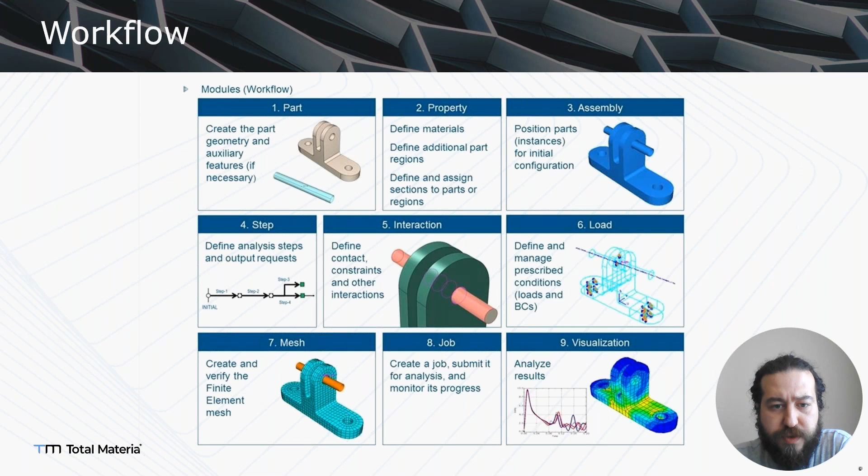So, the workflow we are looking at: the parts, the property, and assembly. Today we will talk a little bit about the parts section and a little bit about the interaction section, I mean the contact area especially.

So what are parts? We are talking about the formed ones, but we also need to consider the rigid parts, which can be included in a forming simulation. For example, a die. We can model it as a discrete part which has a surface mesh, or we can continue with analytic rigid parts, which you can see here.

So if you want a more precise solution, you can go with the analytical rigids. Also, if you have really big strains and really big deformation in your model, you can choose the Eulerian solution, which can be modeled with the coupled Eulerian-Lagrangian method.

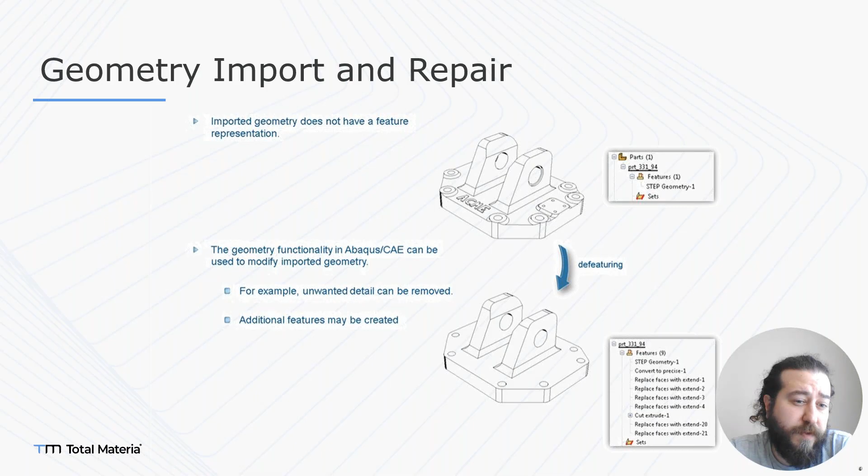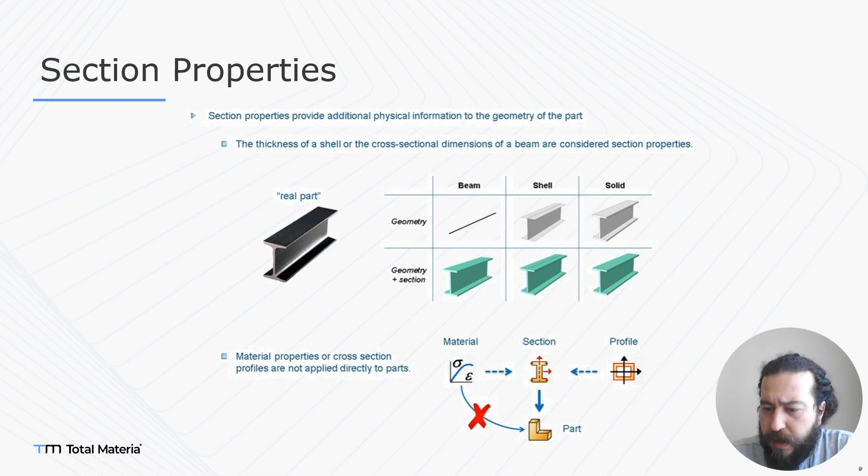But also geometry import and repair needs more attention, because you don't want all the details in your finite element model. So you need to simplify some of the regions. And you also need to choose which properties to apply. You have a real part like the one on the left side, and you can choose which one fits your solution.

If you look at the contact behavior, it is a very nonlinear, challenging effect. In the previous webinar, we talked about geometric nonlinearity, a little bit of contact, boundary nonlinearity, and a little bit of material nonlinearity. But this webinar will be a deep dive on these nonlinear effects. So basically, we have three regions to focus on: the properties, domain, formulation, and controls need to be taken into account.

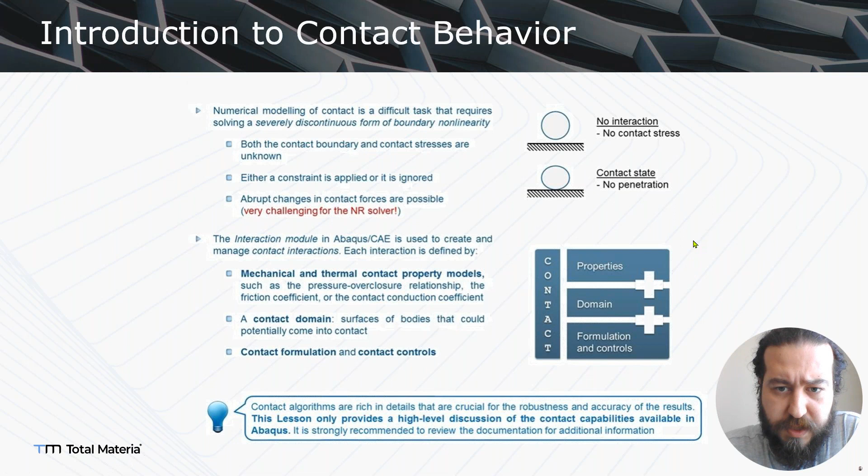This is the challenging part. As you can see, the contact properties have two kinds of behaviors that need to be considered. One is the normal behavior, which means approaching the contact and whether the contact solution is okay or not. The second one is the tangential behavior, which can be assumed as a slippery or sticky condition. Other things are the contact pairs, which contact surfaces can be made, and the roles. For example, master and slave surfaces need to be chosen, and the discretization method, like node to surface, and the tracking approach, finite sliding, small sliding.

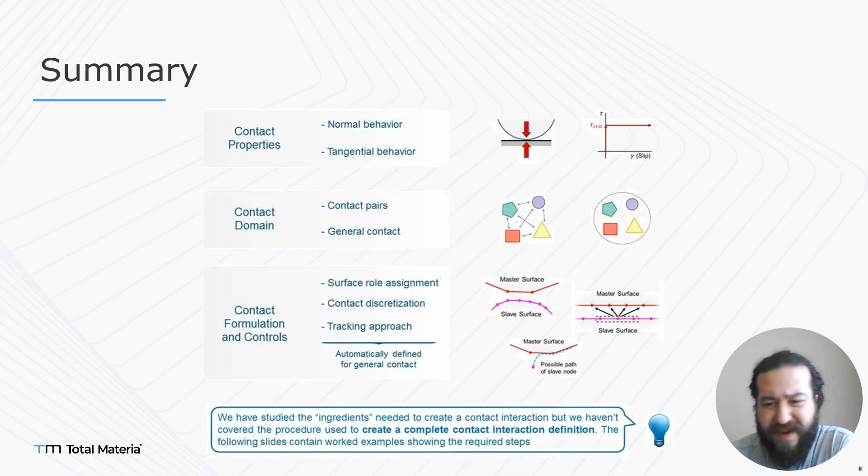But in this webinar, I need to focus on the contact enforcement methods, which are really hard to solve. Before the contact, you can see that there is no penetration and there is distance between the part and the wall. And at that point, in a very small timing area, your stiffness can be really high, which cannot converge with the Newton-Raphson method. So in this case, some enforcement methods come up.

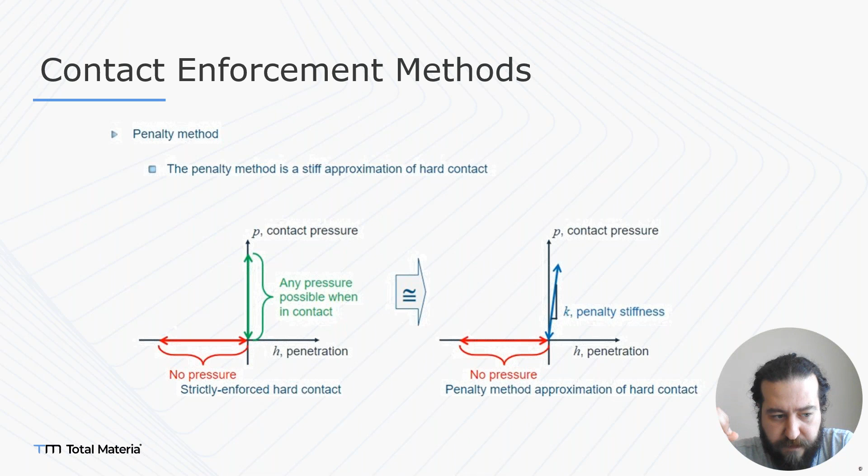One is the penalty stiffness. Of course, there is an error indicator in this contact pressure. We already know about it. If we implement a stiffness at the beginning of the contact and the penetration, we can solve it easily, but we need to check whether it really behaves normally or abnormally.

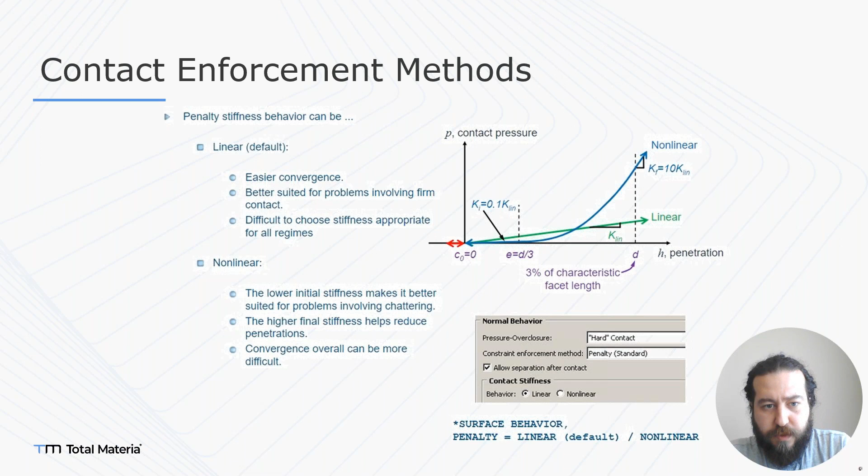So there is another method that can fit both the linear and the nonlinear approach: the augmented Lagrange solution. It can fit a nonlinear problem like this one. Both methods are applicable if you are doing well. If you know what you are doing with finite element methods, you can easily implement it.

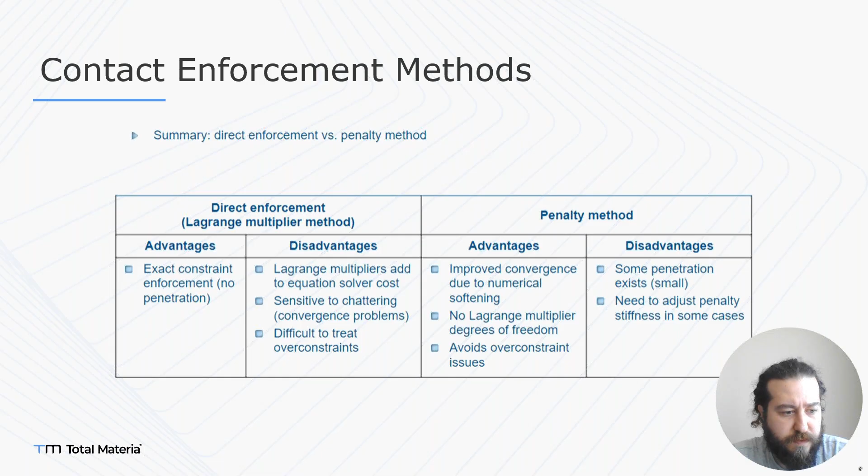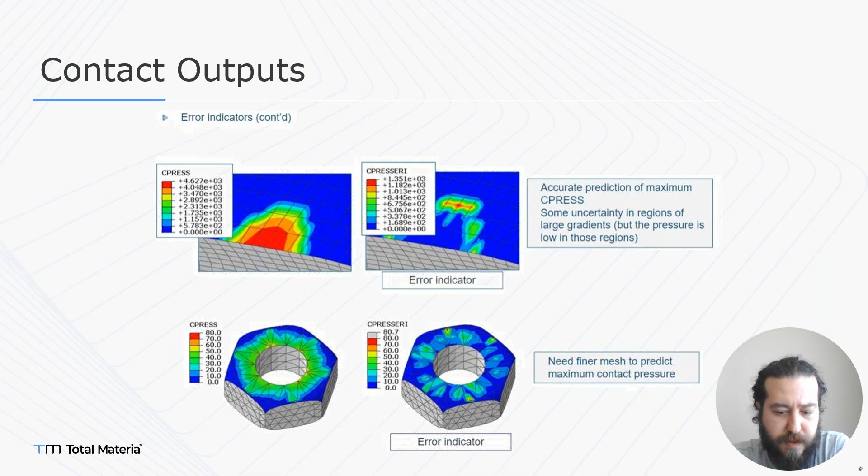And the contact outputs, which is the last thing I would like to say about contacts. For example, if you have a contact and you see the contact pressure like this, you must check the contact error indicator in Abaqus to know if it is okay or not, I mean the meshing criteria. If you are looking for the maximum contact pressure area but you cannot find it, when you check the contact pressure error indicator, it means you need a finer mesh to predict the maximum contact pressure. That's why you need to check your contact pressure and error indicator at the end of your solution.

If we go to material characterization for forming, we will speak about engineering versus true stresses and material test data handling. We have a bunch of Excel files and Python scripts about it. Also elasticity and yield point investigation and its importance we will discuss. And also the hardening curves, Ludwik-Hollomon, and I also put the Johnson-Cook material plasticity model. We can also speak about Swift, Hockett-Sherby, or Voce, whatever you want.

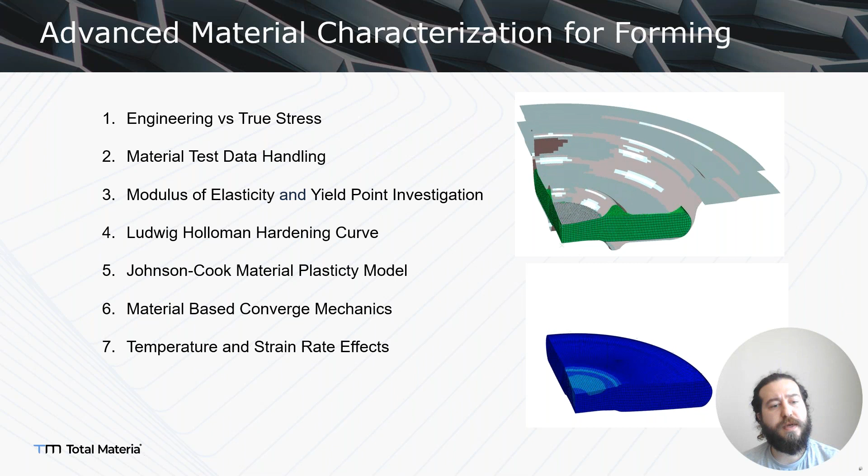And the material-based convergence mechanics we will talk about, and the temperature and strain rate effects. So engineering versus true stress is an interesting phenomenon that I just want to say one word about.

If you are doing a finite element analysis, you need to consider all your test data; all your material data should be true stress and logarithmic strain, I mean true stress-strain. So if you have an input, you need the true stress-strain. If you have an output, you will read the true stress-strain.

Unless you have a hyperelastic material, or really big strains that can be softening, not hardening, like titanium at 800 degrees or something like that, or changing the crystallization area, this one cannot go with the true stress. You need to go for the engineering stress, actually. So this is the key point of which one should be selected.

If you have a low strain like metals, steels, or aluminum, you can easily go for true stress. So if you have test data, you need to consider the conversion from the engineering stress to the true stress. There are also some Excel sheets for it, and you can try to check it.

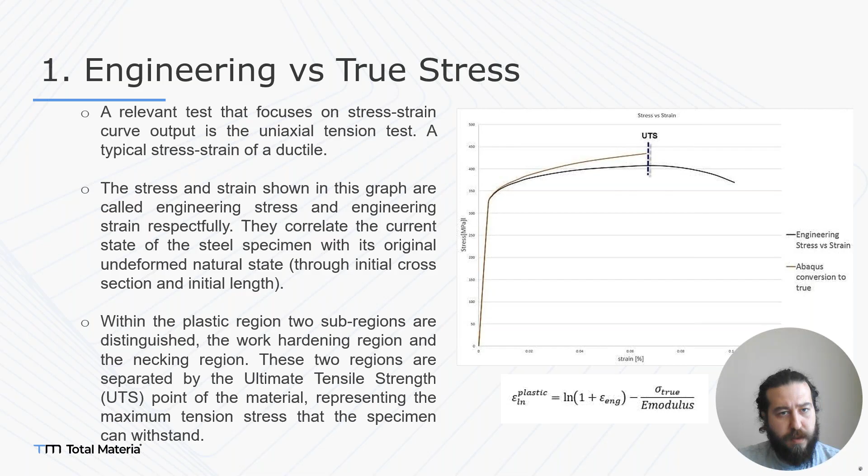You will see the Excel files, I will also share them with Zaim, and you can get them from Zaim, that have nominal stress, nominal strain, engineering stress, logarithmic strain, true stress, and some Young's modulus has been calculated in here. You can directly calculate your modulus of elasticity via nominal strain, I mean the test stress data, directly, because in lots of metals, converting from engineering to true stress is a very low change. So it doesn't change the calculated modulus of elasticity at the end. It could be both true. You have an assumption, actually.

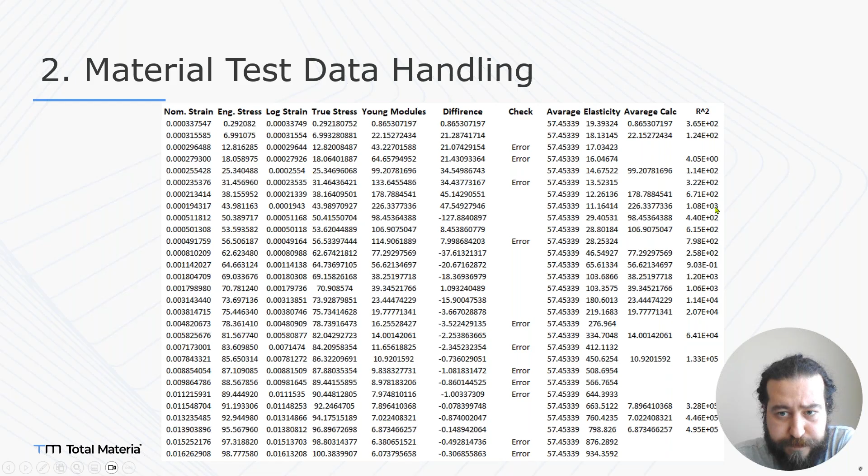But before you go there, you need to check your data, the differences, I mean whether the stress level is increasing or lowering. You need to check it before you calculate your average modulus of elasticity, and you need to check your R-squared value according to the average calculation.

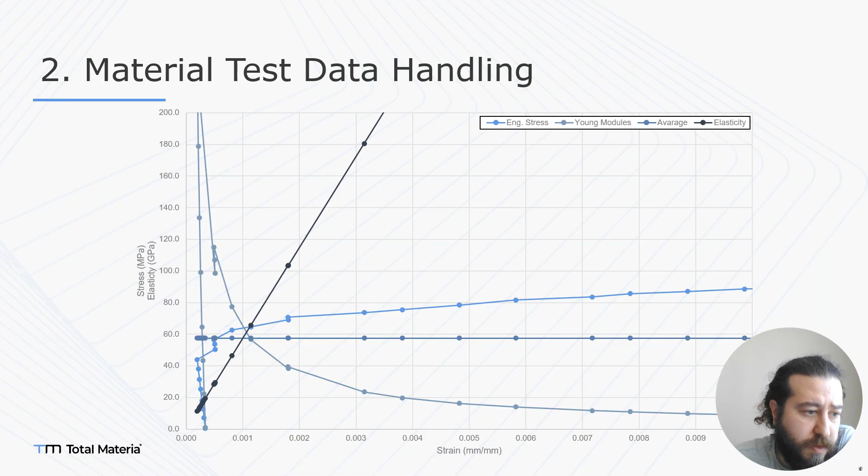For example, some data is really bad; as you can see, you have an engineering stress in here, the light blue curve. So basically, you are investigating your modulus of elasticity, but you see that there is an error in here. It's going to negative strain. So you need to check your data. Maybe you can shift it, or you can just manipulate it. So you need to grab the elasticity in here and the average values in here to check which modulus of elasticity needs to be taken into account.

So basically, if you have a material like this one, you can see that there is no specific yield area. This is not the yield, by the way, because this curve is not linear. So if you have a material but you cannot find the yield point, you need to assume it. If you have hot forming, at higher temperatures, you can basically go for the Hollomon model, which means directly the plastic area.

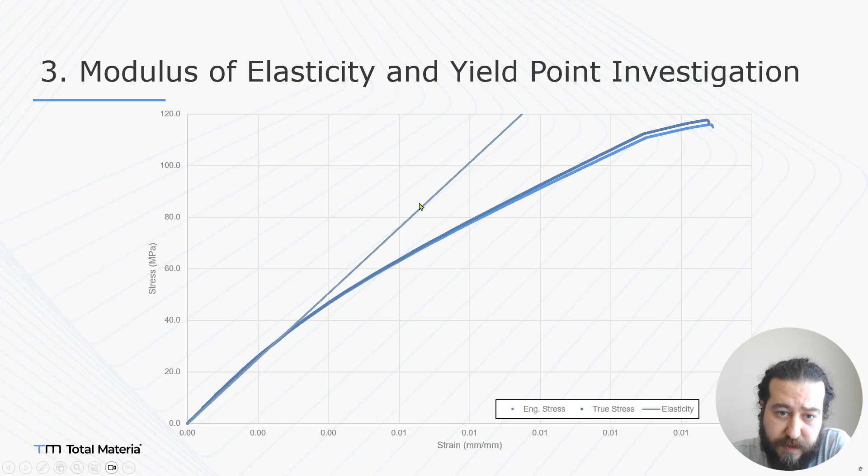But if you have a springback effect, like cold forming, for example, you need to identify your yield point and modulus of elasticity because of the springback effect. So before you go there, you need to understand which area can be fit, or which line should I take into account as the modulus of elasticity. As you already know, the tangent of this line gives us the Young's modulus.

One of the differences is that Hollomon has no yield point. I already talked about the hot forming area, so you can directly use this one. You assume that there is no yield point at that temperature, so I can easily go for hot forming with it. But you also need to assume that there is really a temperature effect in hot forming.

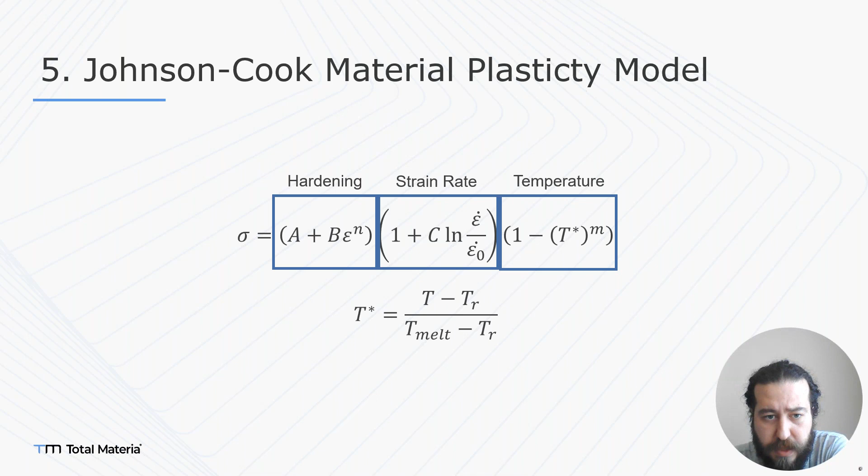In the Johnson-Cook material model, you can see this formulation is also derived here. This is the Johnson-Cook material plasticity model. In this area is the hardening curve, then the strain rate dependency, as you can see. This one is the reference strain rate value, and also the temperature side. I have some examples to calculate these strain rate effects and temperature effects. I will also share them, but I can mention them here.

And this one is the material-based convergence mechanism. In the previous webinar, we talked a little bit about this one. If you have a last stress-strain point like this one, you can sometimes go beyond the last point. By default, in most finite element software, this is a constant stress level, always going into the infinitely plastic strain domain. This is really a big challenge for convergence, because with this default you have no tangency, you have zero stiffness here.

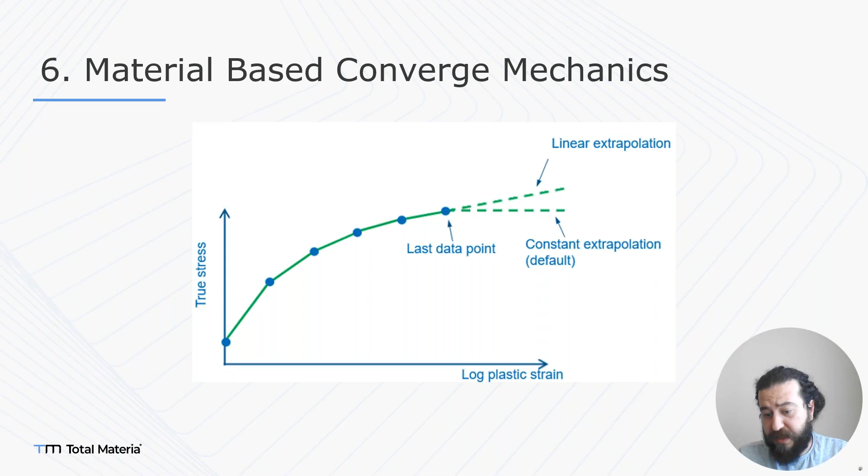But if you model it as a linear extrapolation according to the previous data point, you can assume the same tangent here, and I will just put the last data point somewhere like here. Then I can easily observe the equivalent plastic strain to check the last strain and the last elongation value, whether it is okay or not. So you need to go for the equivalent plastic strain here. I don't want to go into hydrostatic and deviatoric stress or the related equations. We don't have much time, but just think about it.

Okay, the last one is material characterization. For most materials, increasing temperature lowers the stress-strain curve and also lowers the modulus of elasticity, as you can see, most of the time. But if you have a recrystallization effect or a different material, it could depend on the crystal structure you are looking at. You also need to consider the latent heat effect.

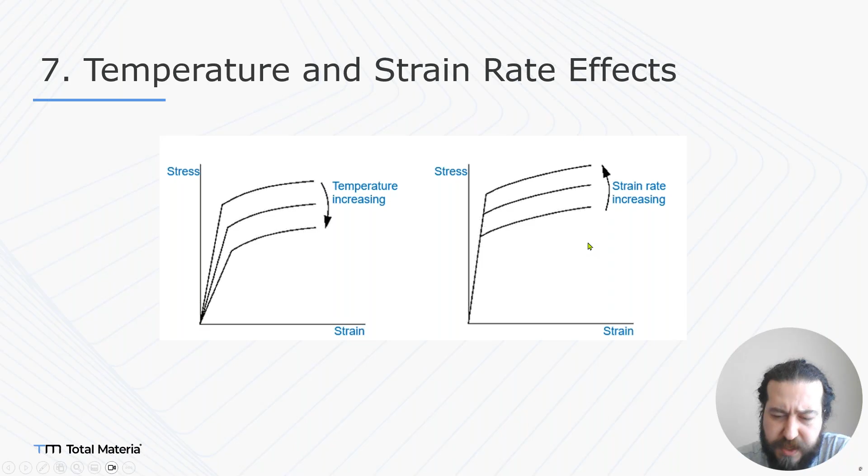On the right side, as you can see, the strain rate is increasing. If the strain rate increases, meaning much faster deformation in your model, you need to consider that increasing the strain rate increases the ultimate stress. But most of the time, the modulus of elasticity stays constant. It changes just a little, but you can assume there will be no difference.

And I would like to mention the Python scripts and material characterization. I will give you the Python script freely, and the Excel files. I want to talk about the Excel solution first. Here are the stress values, the test data, this one and this one. This is the reference strain rate effect, and this is the calculation according to the Johnson-Cook material model, and the root mean square error is calculated according to these values.

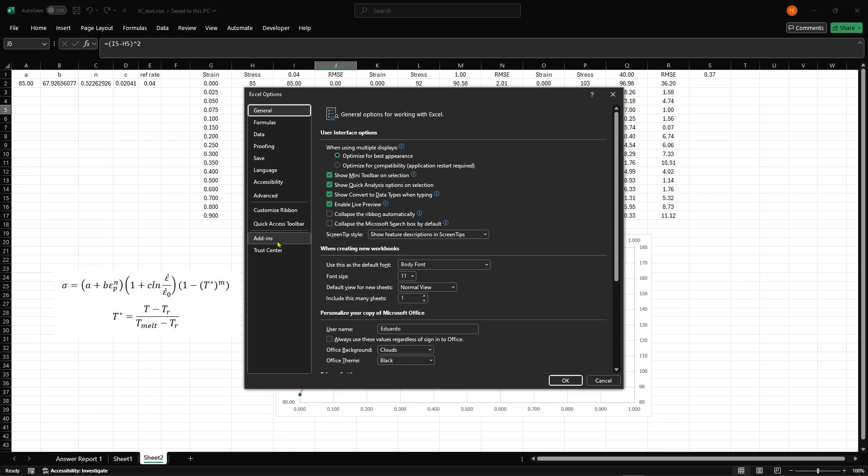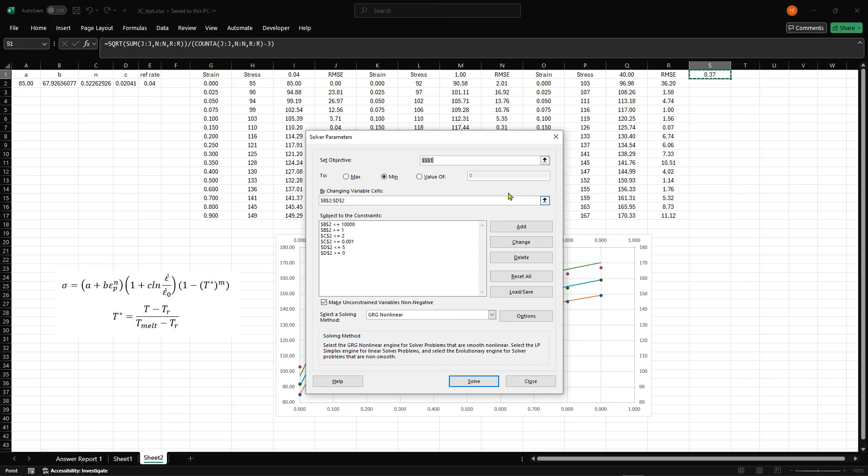So in Excel, you can go to File, Options, Add-ins, and Excel Add-ins. You can check the Solver add-in here, and then use the Data section and the Solver. As you can see, you can change the solving method and the constraints, and set the objective to minimize the total root mean square error by changing these values. So if you get the Excel file, you can directly use it and regenerate it easily.

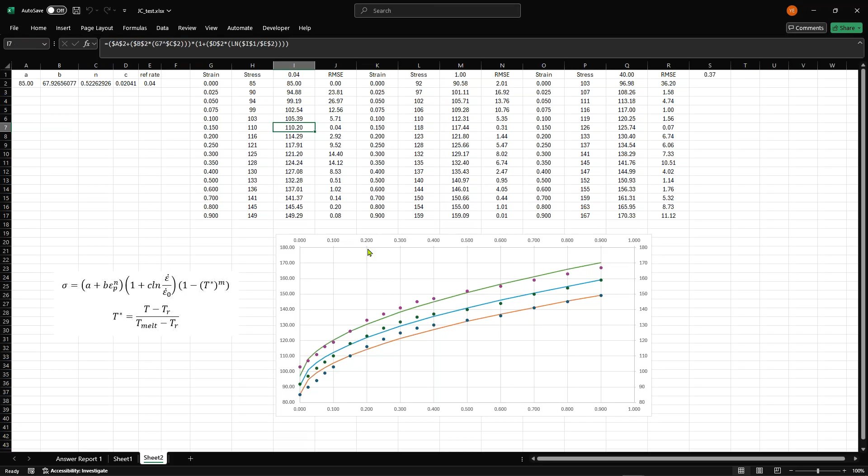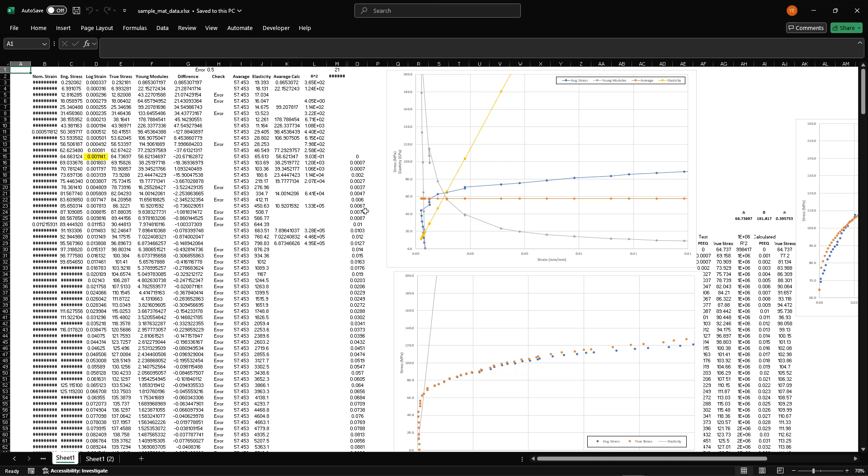Another one is the conversion of engineering stress strain to true stress strain; as you can see here, you can directly paste it. And sample material data, check it. There is a calculation of Young's modulus and differences, averages. And the curves, as you can see, predictions in here.

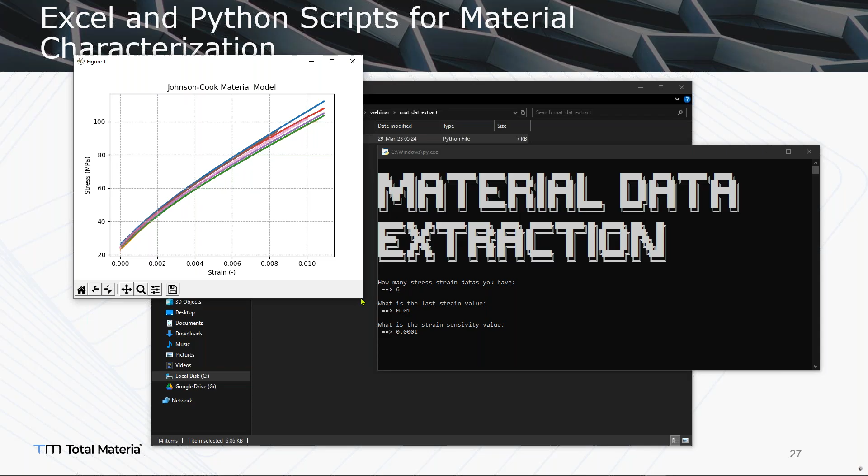What is the last strain value? It could be a prediction, not the exact value. So like this one, and it asks the sensitivity. This is curve fitting actually, not rocket science. So when I click it, I can easily get the material calculation and fit all the curves in here. As you can see, there's lots of data in here.

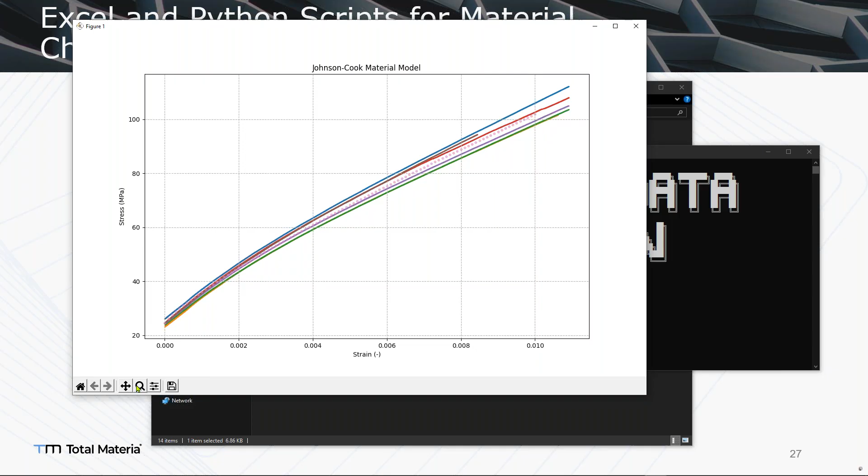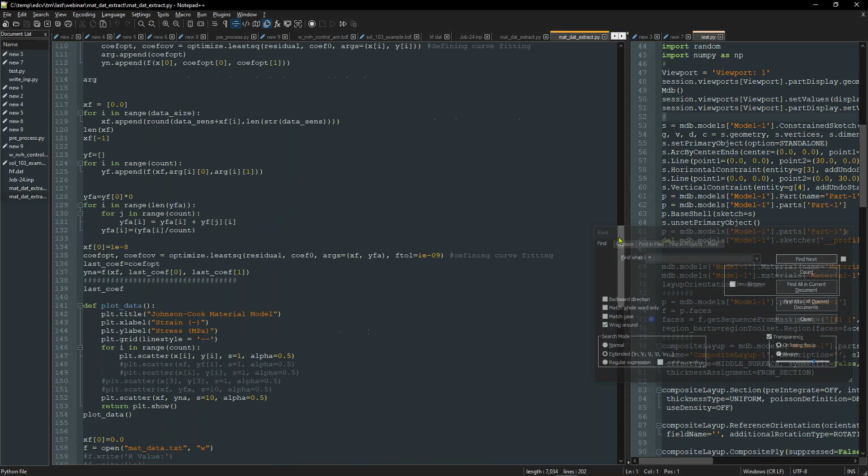At the end of the script we have this mat_dat text, so K and n values, which are related to the Ludwik model, and also the yield point. You can directly use these. The scripts and the Excel data, you can directly manipulate them here. You can change the equation, which model you want to go on with, and easily apply it. It is free to use. You don't need crypto actually.

So Zaim, it's your turn actually.

Thank you very much. So obviously, we need to understand a material's elastic to plastic behavior and what engineering versus true stress strain is. We need models of elasticity, aka Young's modulus, strain rates, hardening, strain rate, temperature, and all this data, right? So we basically need a reliable information source.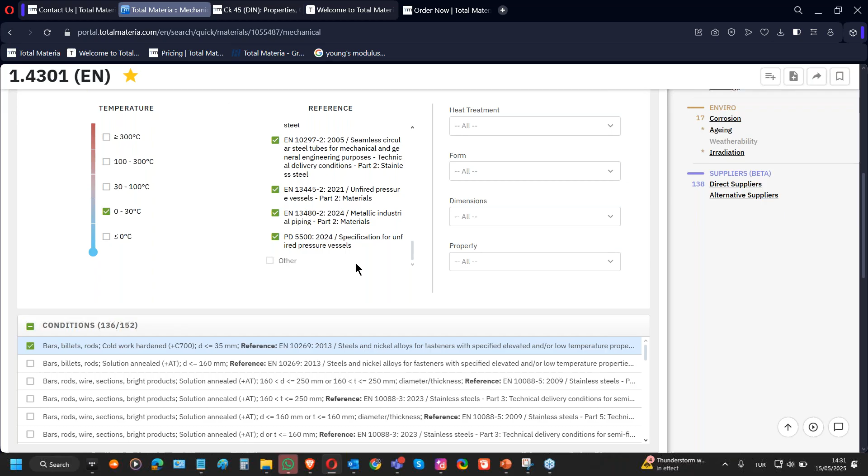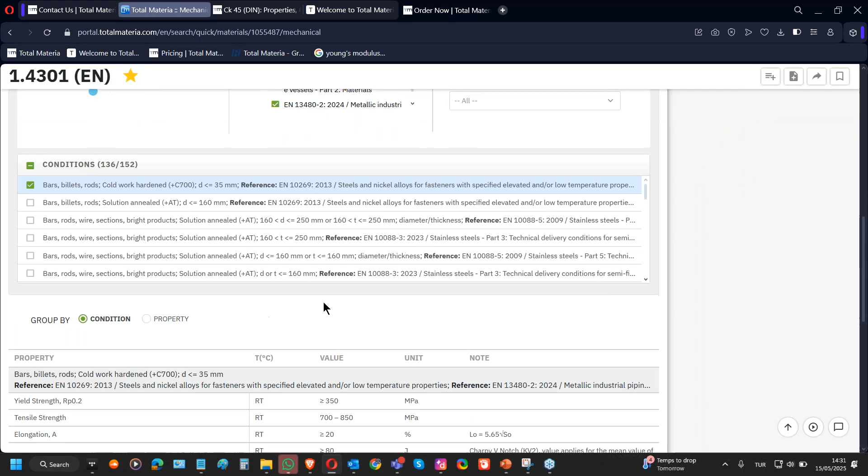Directly, you can check the details and graphs, or you can dive into the detailed view. There are many standard references here for 152 different conditions. Of course, the same material depends on which heat treatment, which form, or what dimensions of the material we are talking about. Not only different mechanical and physical properties, but the same material behaves differently, right? So here you can check all these details about the material.

That could be an option, but we need some more detailed information like stress strain, right? You can reach it directly from Total Materia.

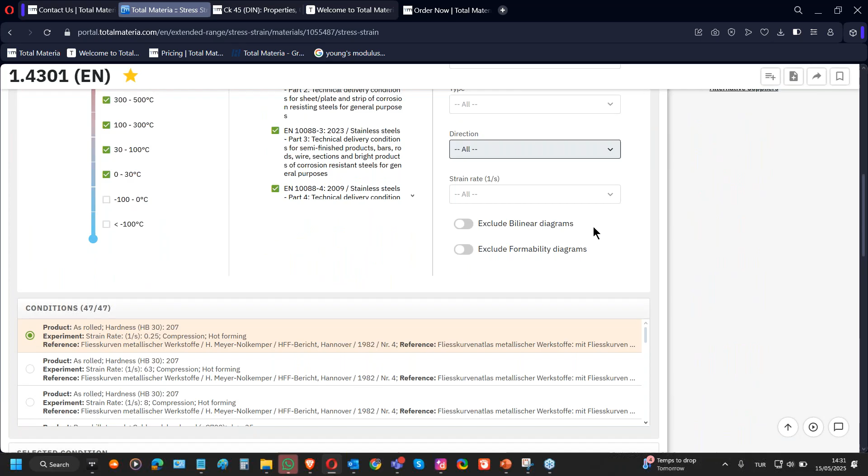You see, bilinear diagrams. This is kind of one of the new features of Total Materia. Sorry for the interruption. Yeah, so easily we can see the strain rate dependency here, on the left side of the condition. In different strain rates, we can see that. So we can implement it easily.

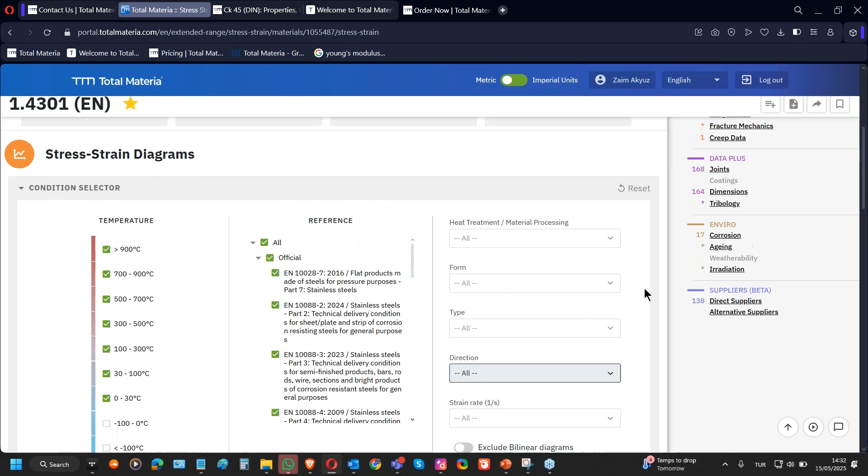Yeah, definitely. It depends on the design where you are going to use it, including formability curves. It gives you high strain curves, forming limit curves, bendability, R factors for pressing. As you can see, we have the strain rates here clearly, and this is the comment of the test. These tests have been made already.

By the way, if you want to search not only one particular material, but dive into the extended range where you need high temperature strain rate values, or you want to filter very, very high strain rate values, especially for crash simulation. I think Bart will agree that these are very valuable information that we have.

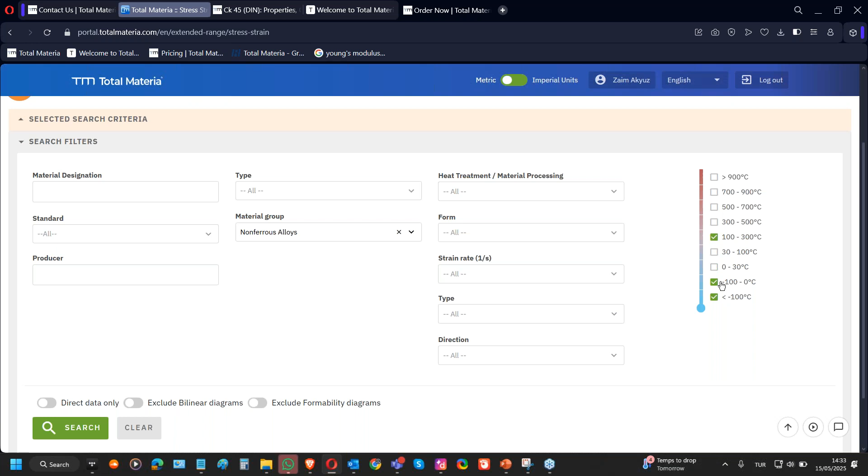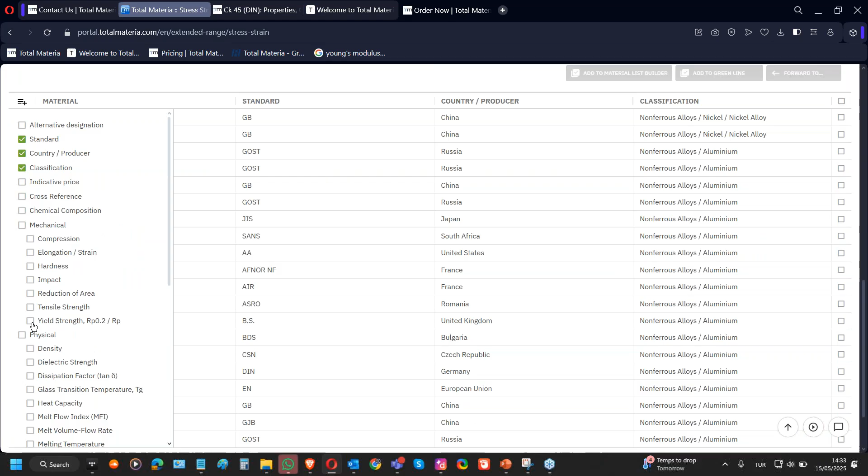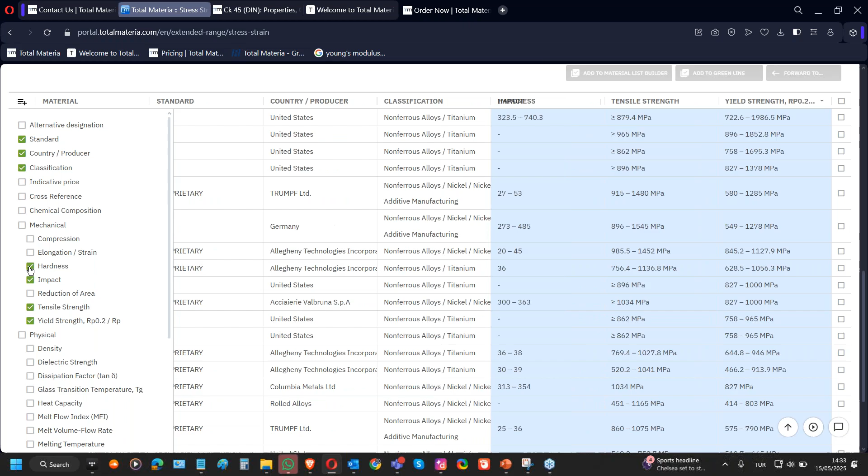Like, let's say one particular material group that I received a question about this week, non-ferrous alloys. We need some material information, but in between 100 to 300 degrees, how many materials we have, we can easily check, like thousands of materials. At the same time, you want to see tensile and yield strength values of this material. You want very, very high tensile strength, or very high yield strength, or impact strength, or hardness, whatever you want to see about the material, you can easily filter.

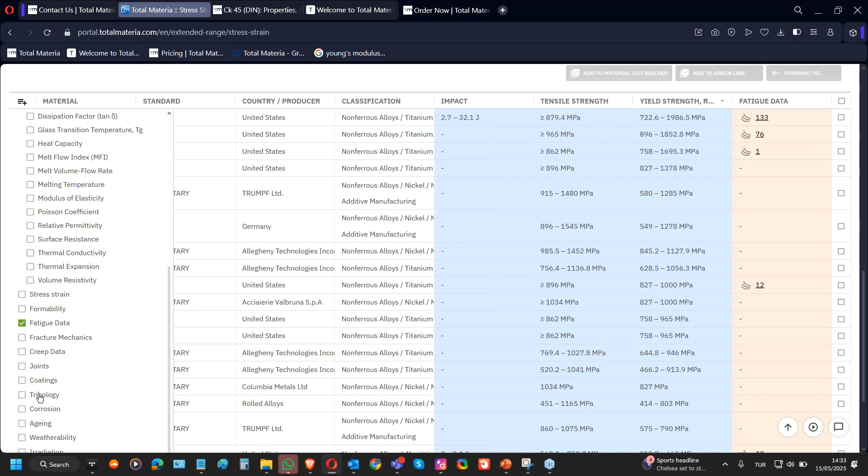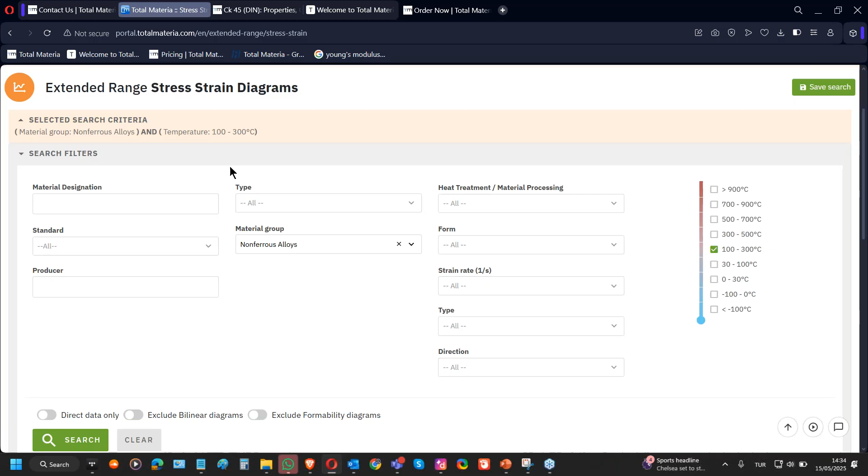You still can see the stress strain values, fatigue information, joints, and even direct supplier information. I mean, Total Materia has all this data because it's been 26 years. Total Materia is online, so whenever you want to use it, you can ask technical support. You can watch some short guided tour videos about it, or you can get direct technical support. There are a lot of things to say about Total Materia, but I just want you to know that whenever you need, you can use it, and whatever you want to find inside Total Materia, we are ready to help.

One last thing I want to ask Zaim. Please. Is it possible to check whether the stress strain data we are reading is engineering or true stress data? Well, sure. It all depends on the material, because of our quality certificates. Total Materia is a reliable information source, right? So we cannot add any information without showing you the references here.

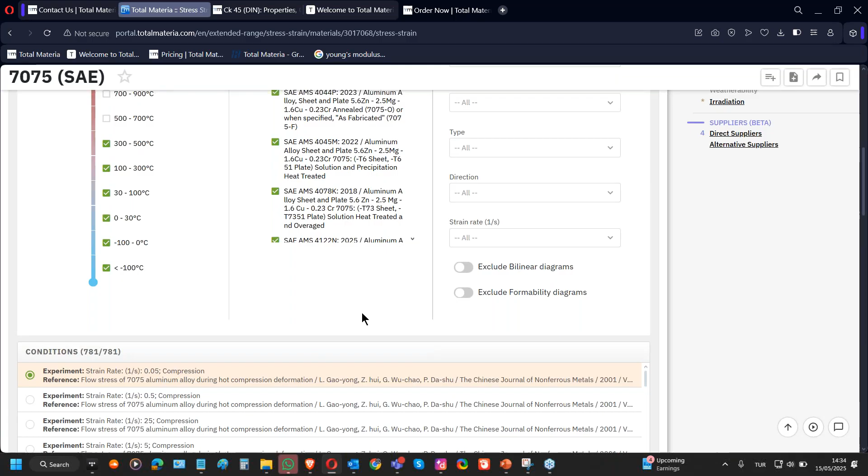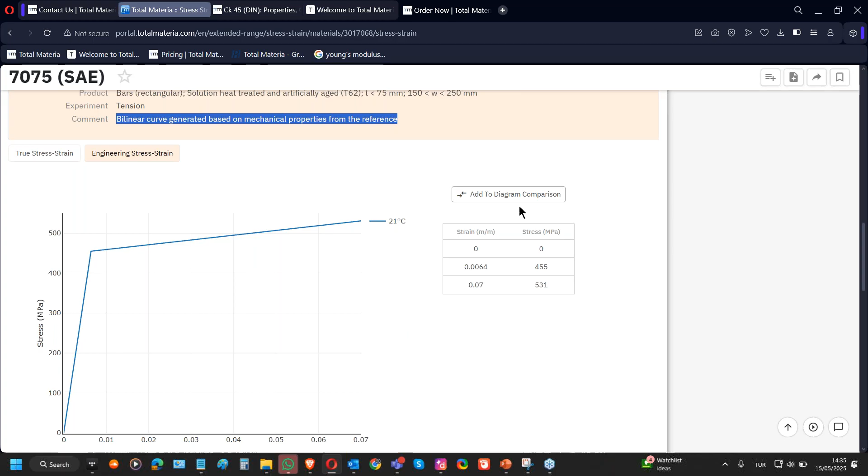If the reference provides all this test data, for different materials and different conditions, as you can see in this test, in detail, we have true stress strain and engineering stress strain. These are very important. You just explained basically when we can use engineering and when we need to go to true stress strain. So these are very, very important values. Plus, you can add them to diagram comparison. We do have a lot of data. So that's all I want to say.

Please continue, Erdi. Absolutely, we want to hear more details about finite element analysis. Okay, your turn, Marta.

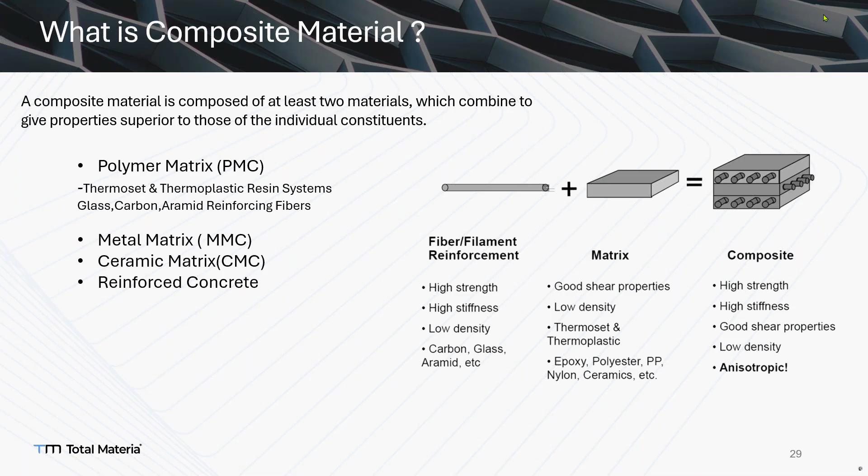All right. So I would like to start with what composite materials are. The definition of composite materials is a combination of two materials with different physical and chemical properties. As we know, there are really different composite materials, as shown: polymer matrix, metal matrix, ceramic matrix, reinforced concrete. We will only talk about unidirectional polymer matrix composites. As you know, there are different kinds of polymer matrix composites as well, in terms of woven or knit. So yes, we can move on.

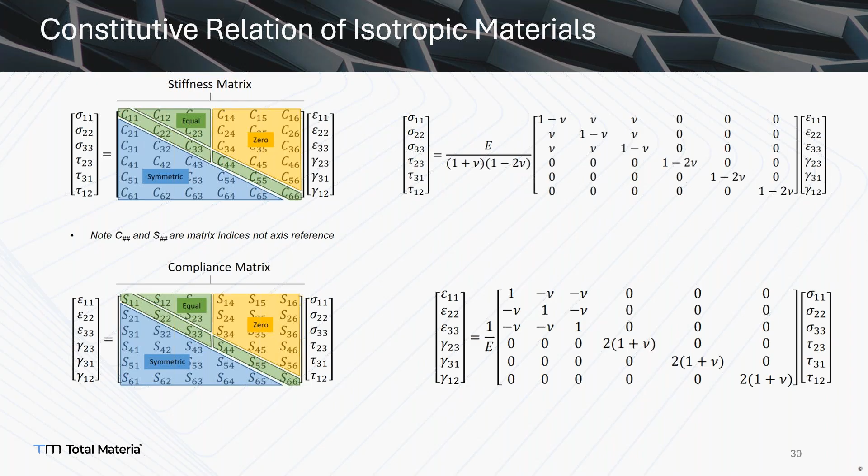So as you know, in a 3D stress state, we have the constitutive relationship for isotropic materials, and it has two independent engineering constants to model that. Go on, please.

So the question is, as you can see, it's a little bit challenging to model an orthotropic material. So is there any better, or I would say more efficient, approach? Yes. By the way, when we're talking about composites, it's a combination of laminae. A lamina is one sheet of composite ply. So when you combine the sheets with different angles, you get a laminate.

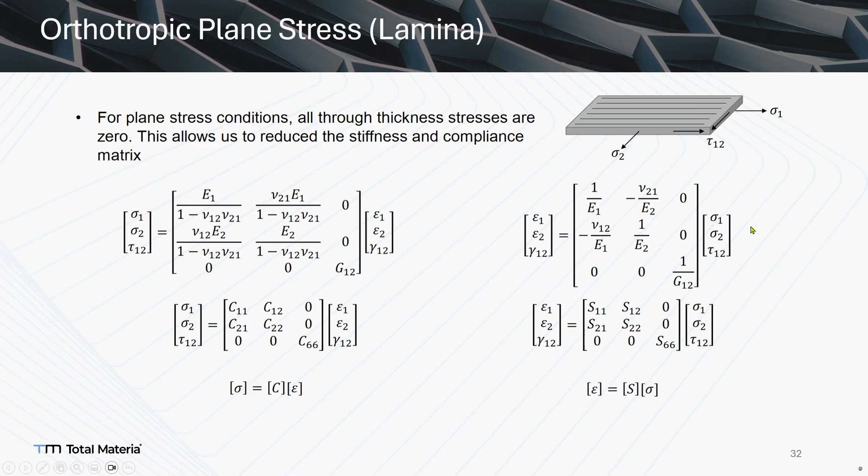So first, as we know, we can combine our composite material in different directions. So we need to distinguish that we have a material direction, which means the direction our fibers are oriented, its material orientation, and we have our global coordinate system or global orientation. So in order to get the off-axis stiffness of a composite material, you need to convert the material properties from the material direction to global coordinates.

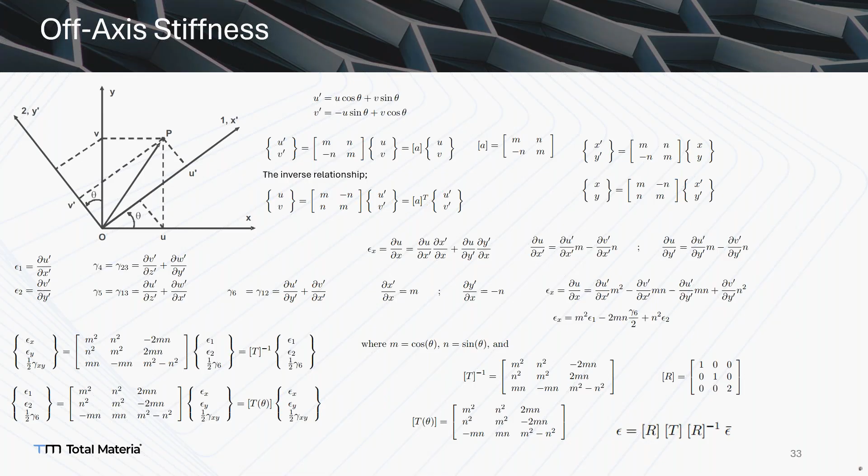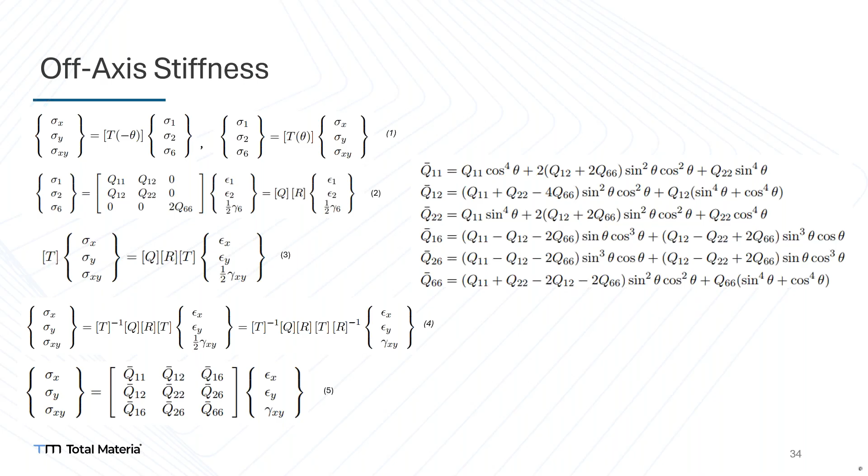So we will use a transformation matrix. I will not deep dive into it. You can always check it, because we have other things to talk about. Go on, Erdi, please. Okay. I will only say one thing. So this is the stress-strain relationship, and this Q bar, for one lamina, tells us the transformed stiffness matrix. It will become important, by the way. Please go on, Erdi.

So for the fundamental analysis of this kind of structure, we can use classical laminate theory. It's a really fundamental theory, and it is widely used for preliminary analysis as well, and it's pretty useful. But we have our assumptions in it. As you can see on the right, our normal is always perpendicular to the middle surface. It's really important. It tells us that we don't have transverse shear stresses in the out-of-plane direction. Also, we will say that the laminate is thin, so we don't have other stress values in the z direction.

So the displacements are continuous and really small, and the thickness of the laminate will never change in this analysis. Also, I need to mention that, yeah. Sorry, I just want to interrupt. What if our laminate is really thick, and assuming that there is slipping between the layers? No, you cannot model that. In this assumption, we are assuming that there will be no slipping condition. We are assuming a fully elastic solution.

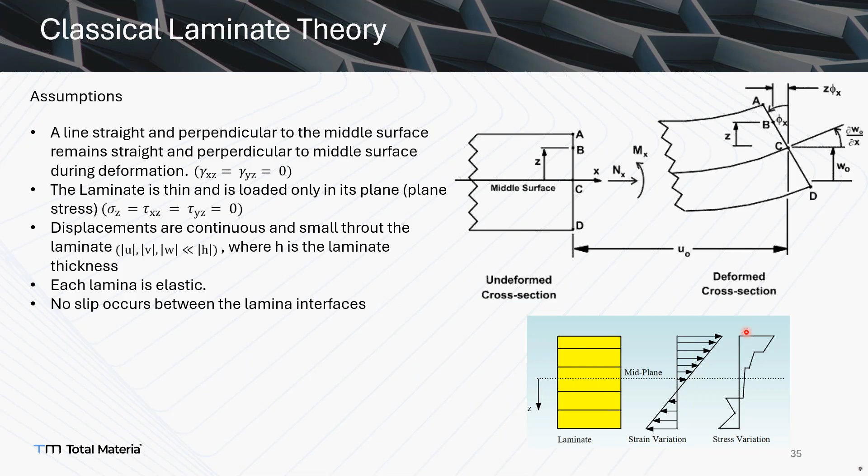All right. So we need to look at the equations of displacements in order to understand our behavior. As you can see, we have three displacements: u, v, and w. W is the out-of-plane displacement, and it is a function of x and y. So it is induced by the moments and the normal forces which act on the plate.

So as you can see, if we differentiate the u in the first equation, you will see that we have a rotation, in-plane movement caused by rotation for the laminate due to bending. So at the end, in 13, we will see that our global strain is about our mid-surface strains and the bending effects. So we can go on.

Yeah. ABD. So from that we will get a matrix called the ABD matrix. It is a really important matrix because it tells us the behavior of the composite. The A matrix tells us the in-plane stiffness of the structure, so its basic in-plane properties. The D matrix, called the bending stiffness matrix, relates the bending moments. And the B matrix relates the in-plane strains to bending moments and curvature to in-plane forces. So it is a bending-extension coupling matrix.

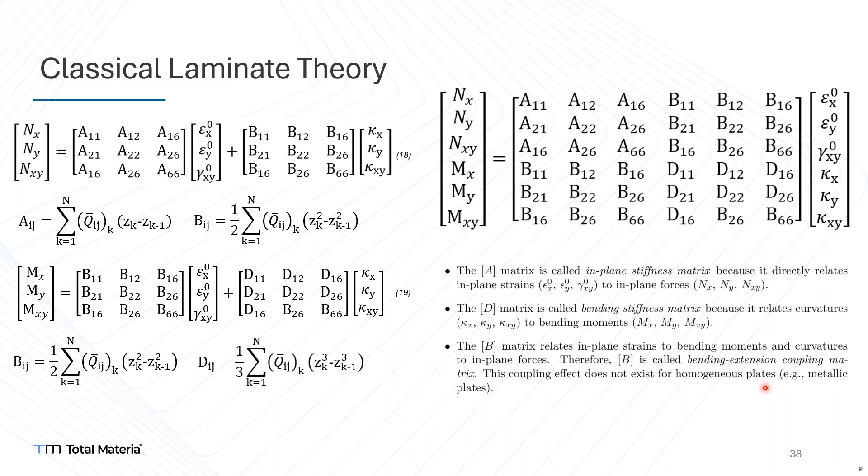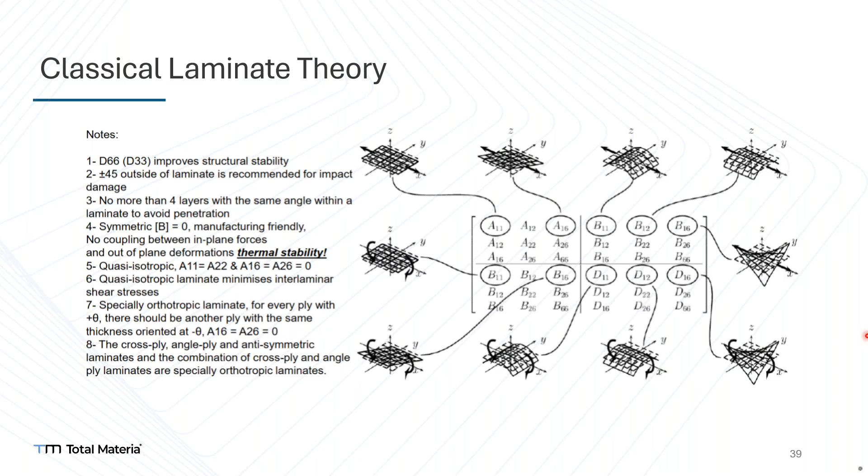Yeah. So I will just skip it because I was just talking about it. You can see the A matrix and B matrix here. We talked about it, and we don't have time for explaining everything. Yeah, sure. So we can move on.

So another thing to increase your efficiency in your FEM analysis: if some parts in your FEM analysis are out of scope, you can use effective properties of the 2D laminate, but it needs to be symmetric. The A matrix needs to be symmetric, otherwise you cannot achieve it. It's a good way, by the way.

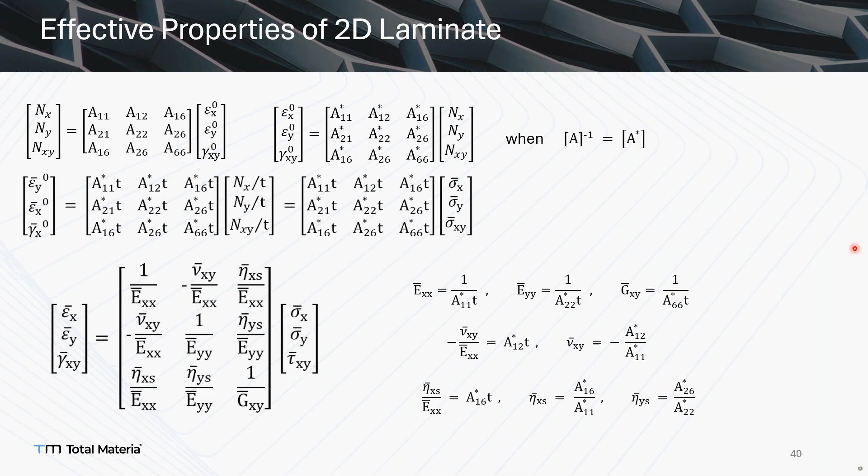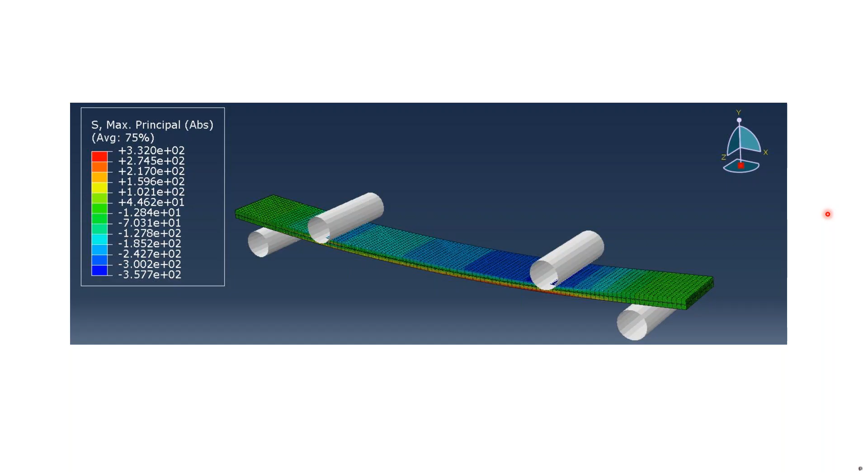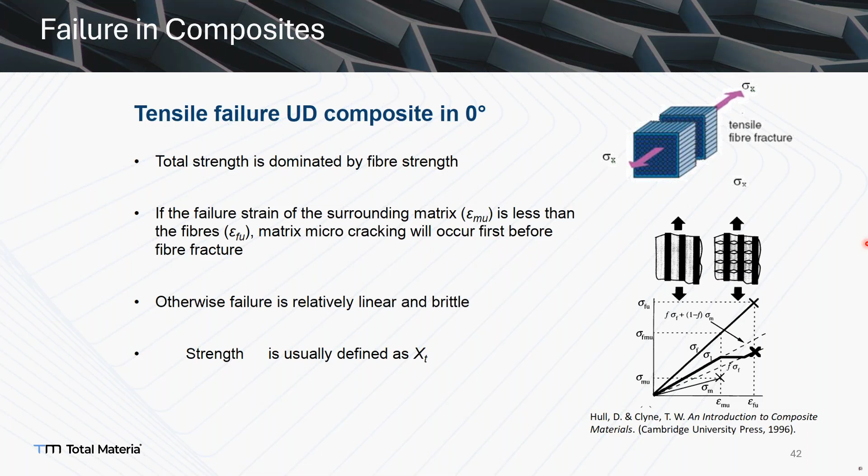So, failures in composites. Right. In this failure mode, as you can see, you have fibers in the zero direction. Most of the time for carbon fiber, you have linear and brittle fracture, but sometimes, because of the difference between the failure strains of the fibers and the matrix, it becomes nonlinear as well. Please go on. Yeah.

I will say that, and I think I can say it more clearly, if you have a resin-dominated behavior, you will probably see a plastic deformation, because our matrix is a plastic material. Normally, in the last slide, you will see that it is dominated by the fiber strength. But right now, and you will see in the other behaviors as well, it is most of the time resin strength and resin-fiber interface integrity dominated.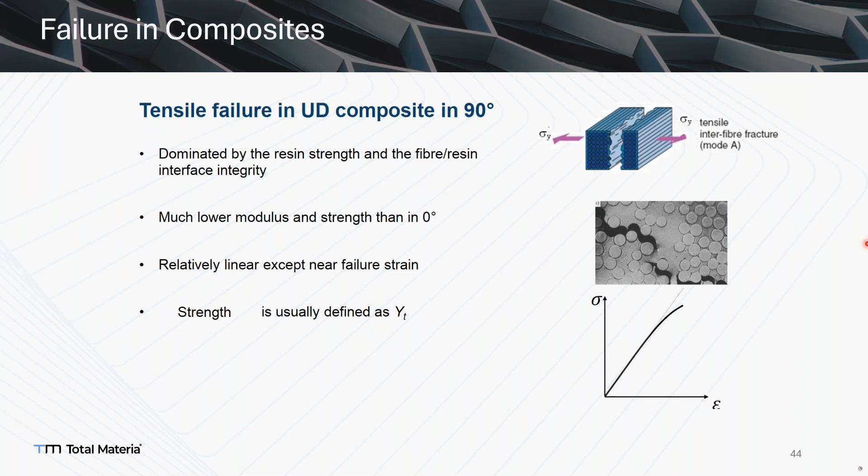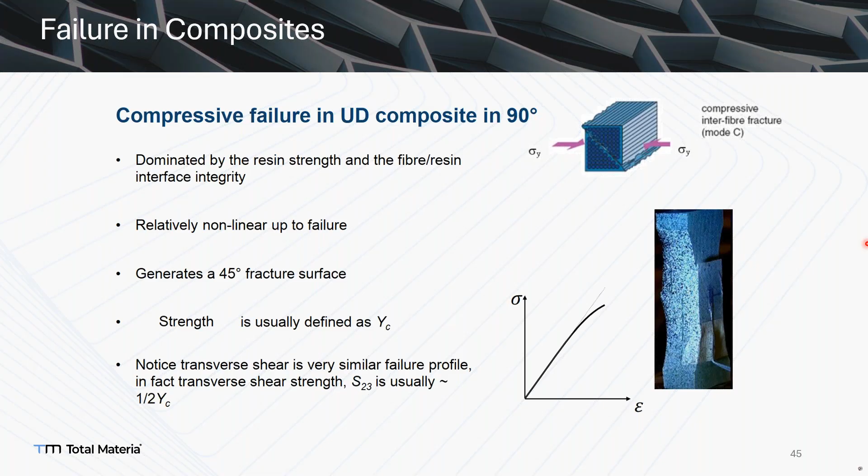So this is, as you can see, relatively linear, except near failure strain, where it's plastic as well. Also, as I said, it's dominated by resin strength. Please go on, Ardi, because most of the time it's the same. As you can see, in the 90 direction you have a 45-degree fracture surface, and the transverse shear has a really similar profile as well. So we can go on. Shear failure. I think everybody understood what I said, so we can go on.

Okay, the failure criteria. It is really important when you're modeling composite parts. Sometimes it's misunderstood, because not every failure criterion is good to assess a composite structure. As we said, composites have extension or shear couplings. So if you use the maximum stress criterion, you will not see the real behavior, because there's always a coupling effect between the shear stresses and normal stresses. You will see that in the other interactive failure criteria. Please go on.

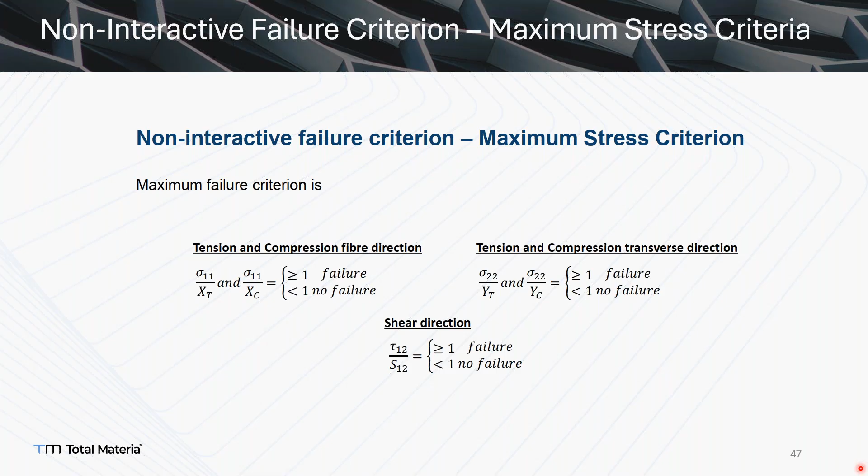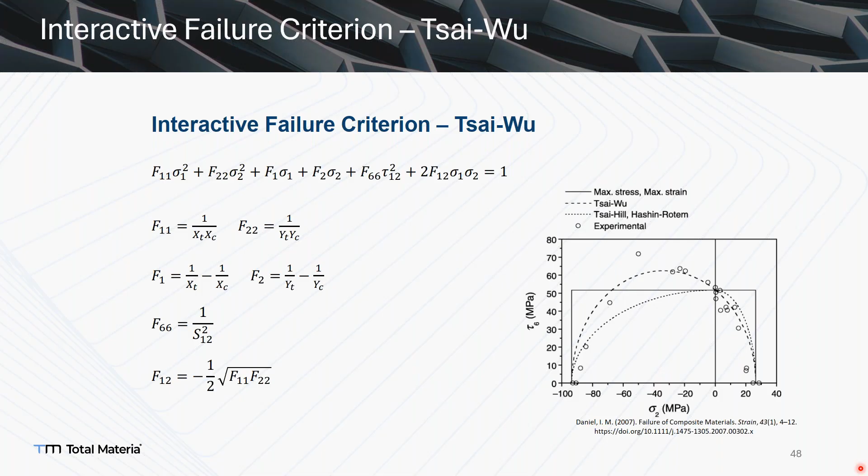So Tsai-Wu is an interactive criterion, but the problem is it does not tell how it deformed or how it failed. It only says that it's failed. So if you're not trying to determine your failure mode, maybe you can use it, but you need to check it with real tests and with your finite element model as well. Basically, Tsai-Wu is the general approach for failure. You can use it for other anisotropic materials as well. It's a really general failure criterion. So we can go on to the last one.

So I will continue with the thermal material properties. We don't have much time, so it will be a little bit faster. If you are doing a pure heat transfer analysis, you don't need to enter the modulus of elasticity or Poisson's ratio. The conductivity, specific heat and density could be enough for pure heat transfer analysis. But if you go for advanced cases, like changing crystal structure, you need to add your latent heat or any internal heat generation, for example.

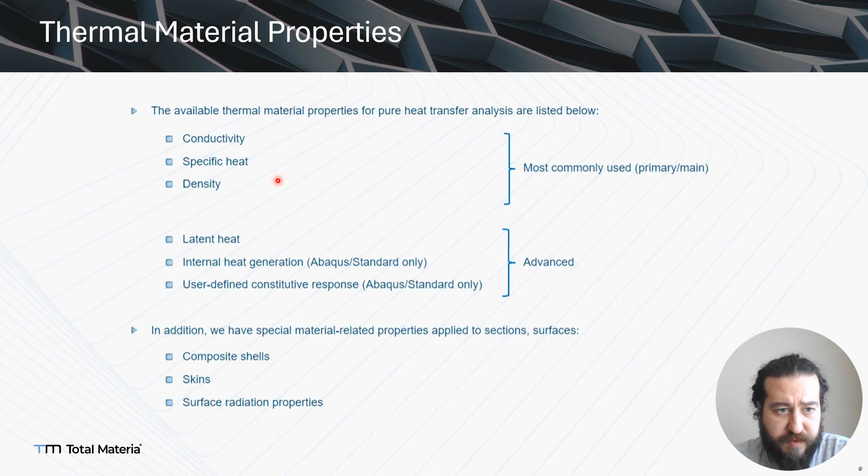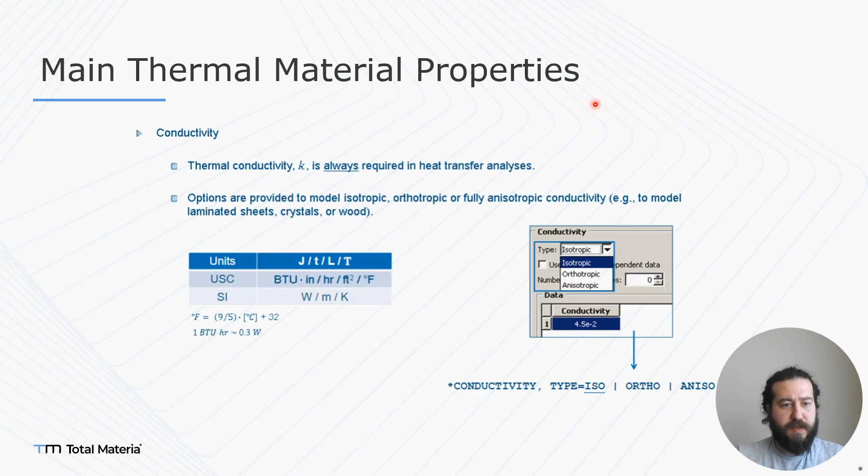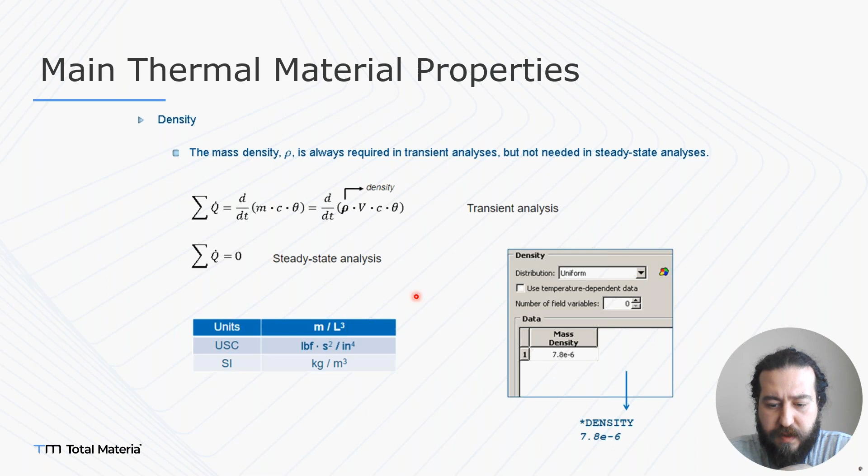We already know that conductivity is required for heat transfer analysis, and you can directly use isotropic or orthotropic modeling in Abaqus. Here are the conductivity units. Density, of course, you need to enter to take transient effects into account, and the specific heat, which is the rate of increase of the internal thermal energy, needs to be entered. These are the units. These three material properties really depend on temperature.

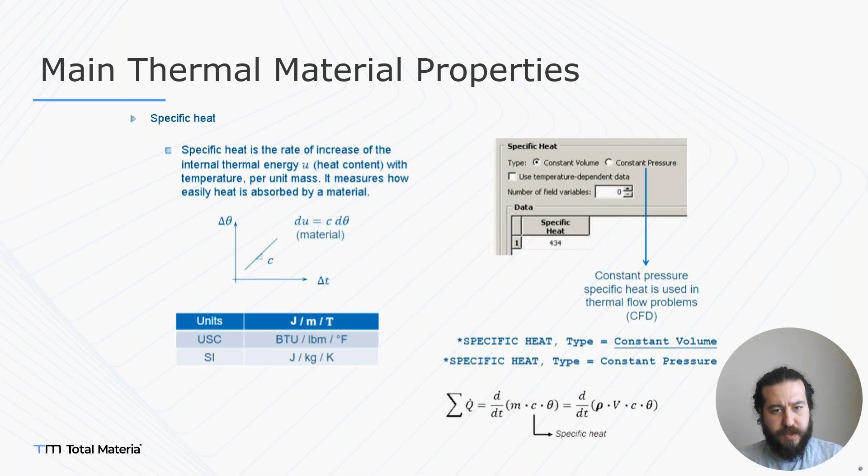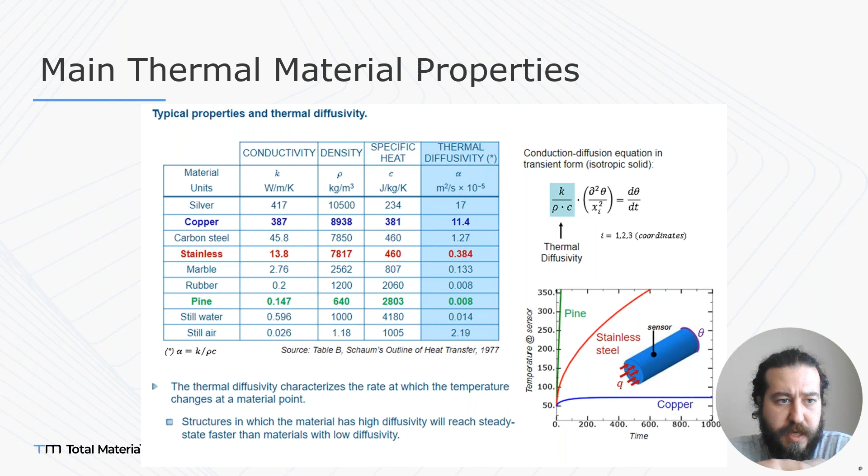So these three properties are really temperature dependent and need to be taken into account. Especially the specific heat at higher temperature. For density, some metal materials are assumed not to change with temperature, but we already know there is a thermal expansion coefficient, so basically density also changes. But considering the changes of the density, we can assume the same constant level if you are doing low

temperature effects. So if we talk about the simulations in the analysis procedures, we can go for the four different approaches. The sequential one is you have a stress analysis and you have thermal effects. You can directly map your NT11, which is the nodal temperature output, directly onto the stress level and observe the output, the stress area.

But in this condition, there will be no effect between the temperatures and the stress level. In the coupled analysis, it depends on it. For example, if you have a contact, due to the contact problems you will get the temperature change at the contact pressure area. If you have more contact pressure, you will get more contact conductivity coefficients. So that's why you need to consider coupled analysis.

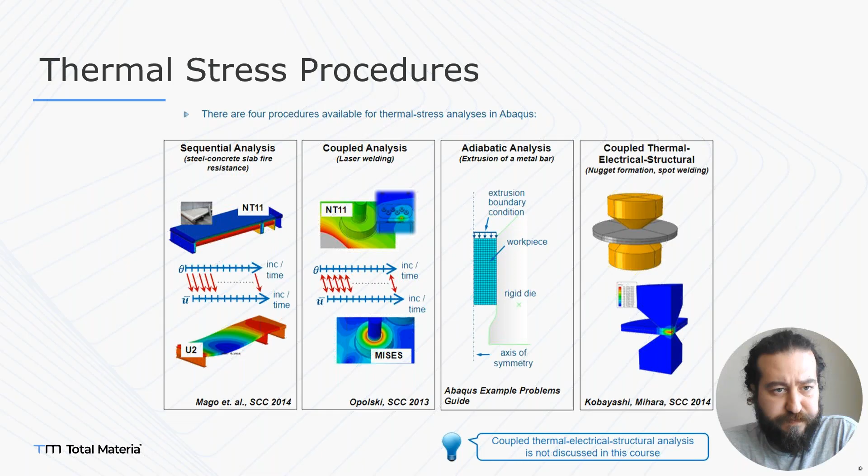So the last one is where everything can happen: thermal, electrical, and structural. This is the nugget formation, the spot welding analysis. It is dependent on the current and on the resistance of the material, which depends on the temperature, and lots of other things. So it's really challenging to solve this simulation. Basically, the different approaches are summarized here, and you can easily get this presentation from Zaim.

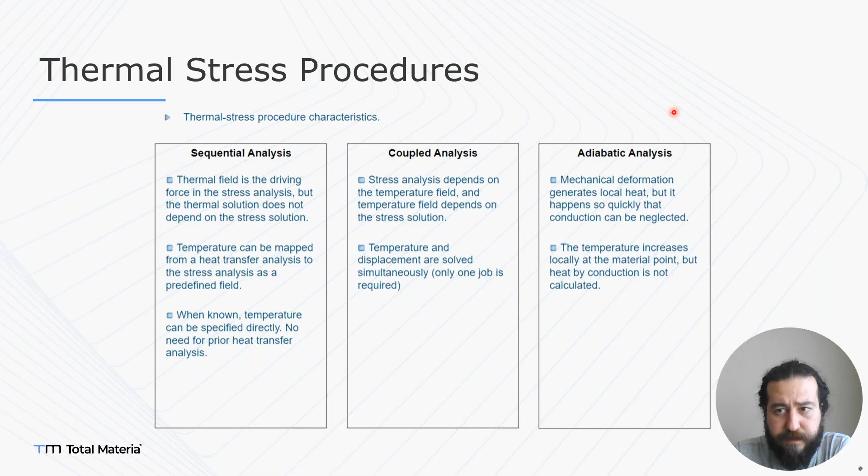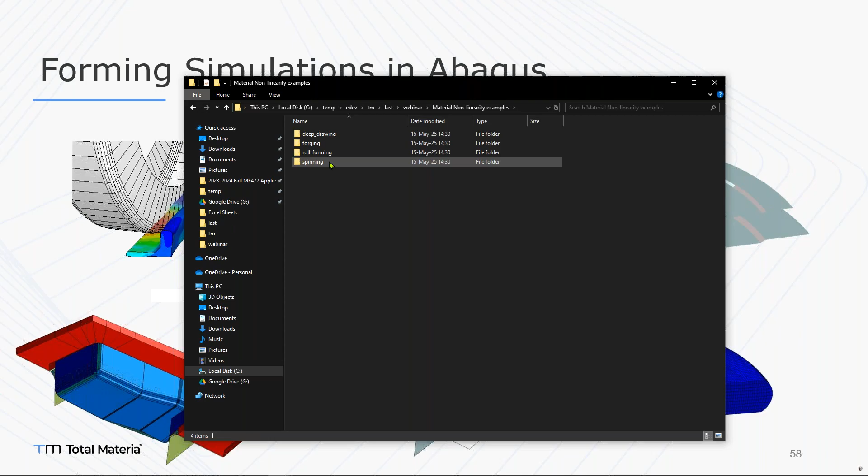So the last one is forming simulations in Abaqus. I have four different analyses here: deep drawing, forging, roll forming, and spinning. Since we don't have enough time, I will directly send you these input files and the CAE files, and you can easily look at them, because in these examples you also have coupled Eulerian-Lagrangian and augmented Lagrangian methods implemented.

As you can see, we have an analytical rigid here, and the forming also here. The Arbitrary Lagrangian-Eulerian method will be implemented here, and here is a Lagrangian model, but it could also be modeled as coupled Eulerian-Lagrangian because of the high strain values here, and the friction level is really dependent on the pressure in this analysis.

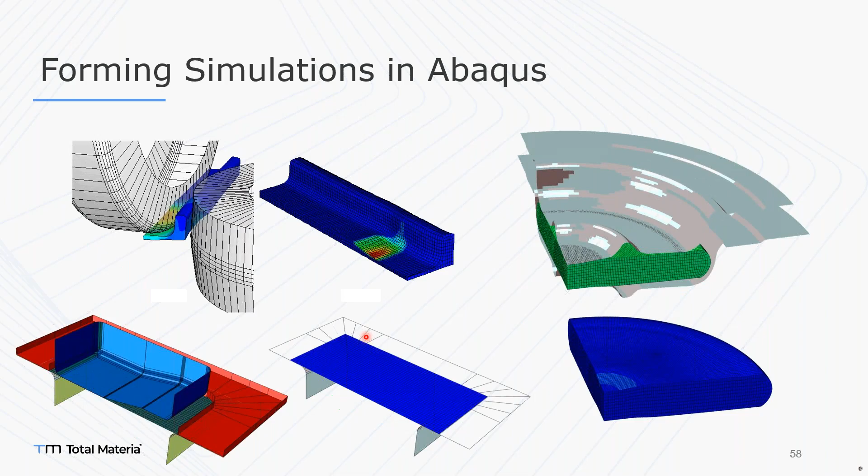Also here we have another analytical rigid die form, but you can also easily model it as a discrete rigid, for example this one. So you need to consider your mesh, and you can use remeshing tools or the adaptive meshing method to observe a more accurate solution. So any question from your side?